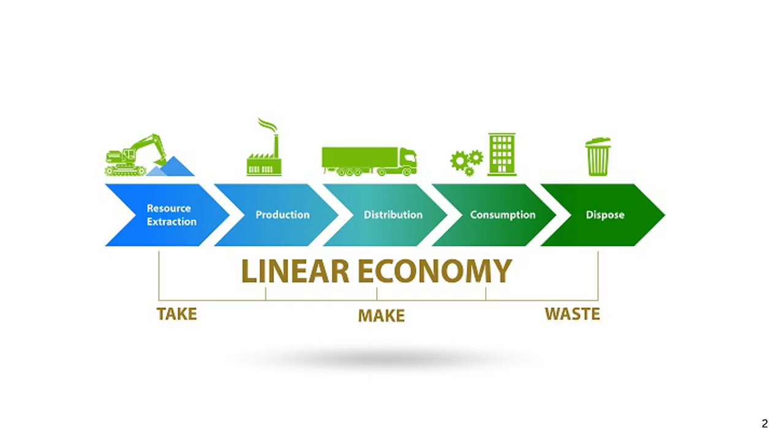So how do we break this cycle? The linear economy cycle, the linear economy model. This is where the concept of circular economy becomes a game changer, offering solutions that prioritize sustainability and long-term prosperity. So let us explore.

What is circular economy? It's a concept reshaping how we think about our world. The circular economy is an economic system that changes the way we have been doing things for decades. Unlike the traditional take, make, dispose linear model, where resources are used once and then disposed of, the circular economy is designed to eliminate waste and keep materials in use for as long as possible.

Here's a simple way to think about it. The linear economy is like using a disposable coffee cup — once you use it, you throw it away. Circular economy, on the other hand, is like using a reusable mug. You clean it, refill it, and use it again and again and again.

It's smarter, more sustainable, and better for the environment. In terms of cost, at the very beginning you may say buying a paper cup is cheaper and purchasing a reusable mug is a bit more expensive, but thinking long term, you can make savings — not only saving money, but also saving the environment.

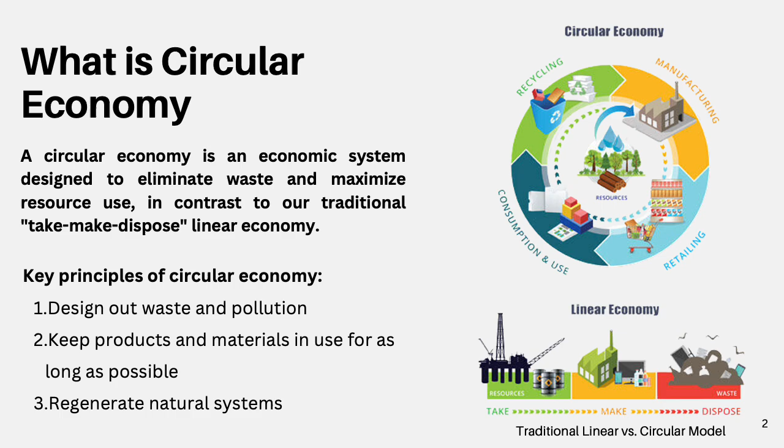Okay, let us break the concept into three simple yet powerful principles that can change how we interact with the world.

First is design out waste and pollution. Imagine if every product, like the packaging for your favorite snacks, is designed to biodegrade harmlessly into the environment, not producing microplastic but becoming fertilizer. You would definitely feel good, right?

For chemical engineers, this principle of design out waste means starting from design to remove the waste and pollution part. So the principle is designing processes that minimize byproducts and emissions. Think about using green chemistry techniques to eliminate hazardous waste during production. How can we create systems that are cleaner right from the beginning?

The second principle is keep materials or products in use. How many of you have an old smartphone sitting in a drawer now? What if instead of letting it gather dust, we recycle the metal inside to make new gadgets? Or better yet, the phone was refurbished and reused by someone else.

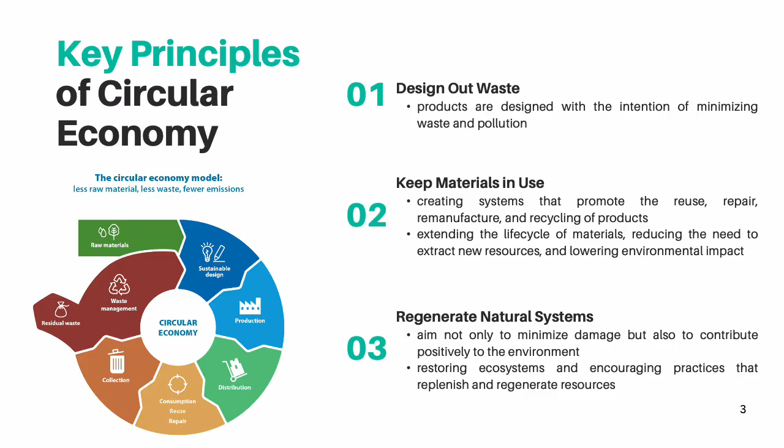You will definitely have a different process flow diagram, because remember, as a chemical engineer, our work goes beyond theories. We create practical solutions that bridge sustainability with industry, from designing processes to recycle material, optimizing how resources are used, and creating energy efficient systems.

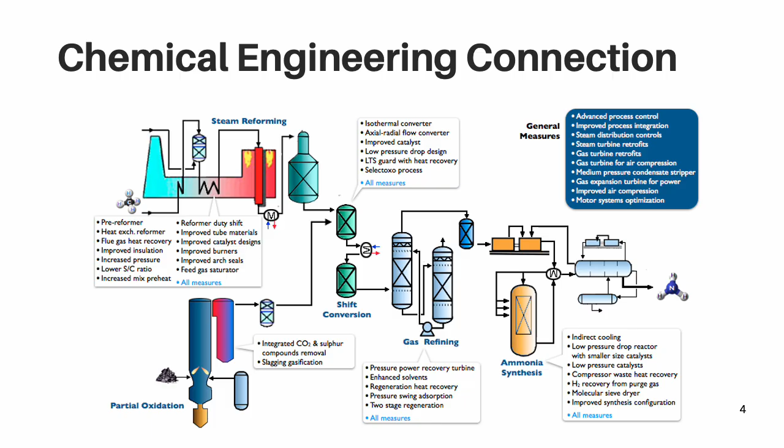So this is just an example, and I'll give you a detailed industrial application. This example is for a solvent recovery system. Let us look into a practical example.

Solvents are always the backbone of many industries, from pharmaceutical to petrochemicals, because solvents play a critical role in extracting and purifying chemicals. Throughout your subjects later, you will identify different types of solvents, and these solvents are commonly used in many industries.

However, this solvent is not cheap. They are expensive to produce, but another disadvantage is they are hazardous to dispose of. This is what you've learned in your lecture before, on law.

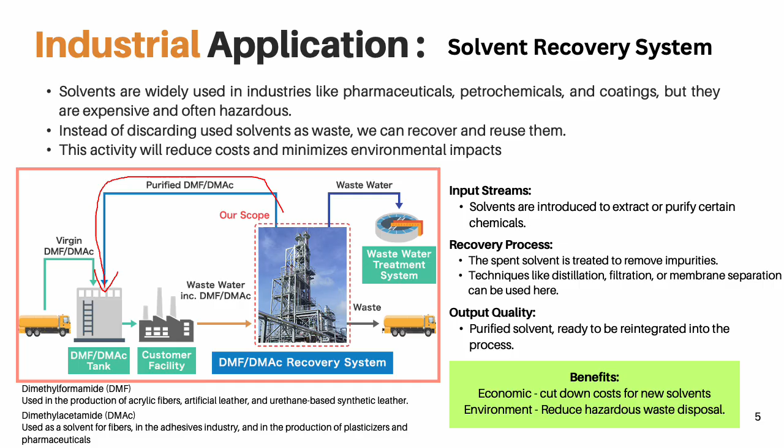So these are the things that can be made from a recovery system. Let us look at another industrial application: steam and condensate recovery process. Steam is a classic example of energy we often waste - once it becomes steam, after you heat certain products, the steam is just wasted. But in a circular economy, you can condense it and use it as feed for the boiler.

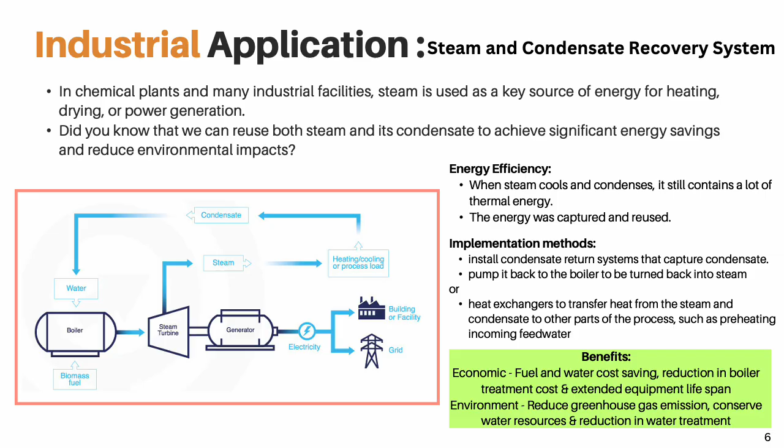So the boiler doesn't need new water to operate. By capturing and reusing this energy, we can dramatically improve efficiency. Imagine a factory installing a condensate system - instead of letting the condensate go down the drain, it's pumped back to the boiler to become steam again. This saves fuel, saves water, and of course saves money, while reducing greenhouse gas emissions - a win-win situation.

Implementation strategy - here we will talk about how to make this system work, because a successful system involves a few key strategies. The first one we want to see, because we want circular economy implemented in our company, is whether we need to install new equipment.

So the first one is equipment requirement. Adding a system like a heat exchanger, and the one that I showed you earlier in the solvent recovery system - these are equipment that need to be installed in a company.

Instead of producing the product, there is another equipment to be installed. The challenge is integrating this equipment into the existing setup without causing major disruption. Modular design can help ease this process. Design engineers, especially for chemical plants, should think about this: if in the future there is a possibility to install another equipment in your plant, you already know the setup area. This you will learn in your final year.

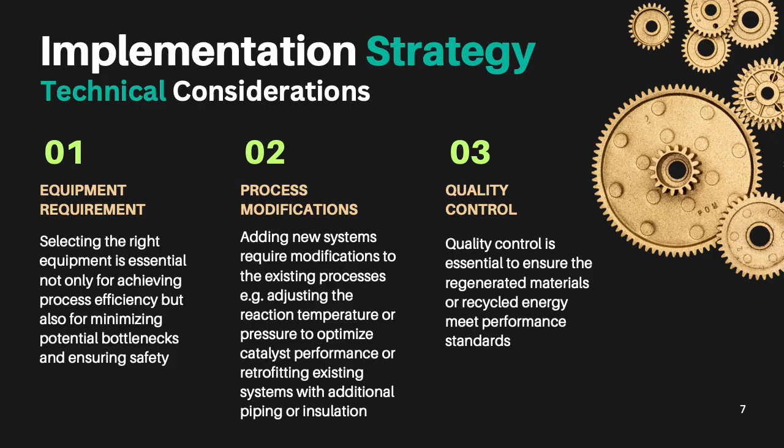Now the critical part, where the bosses will ask you, before you propose to the company, before you start the project, in your proposal you need to ask: is it worth the investment? Does it make financial sense? So to answer your boss, engineers normally break this into four key factors.

The first one is investment cost, the upfront expenses for equipment, installation, and setup. Whatever new equipment is installed in your company for recovery purposes, the equipment cost, installation cost, and setup of the area all fall under investment cost. Normally this is the biggest hurdle, as you need to really convince management that you will have a long-term gain.

Investment cost done, now operational cost. The operating cost is the ongoing expenses while your installed equipment is running, including maintenance, labor working on the processes, and materials used. All this falls under operating costs, which keep the system running efficiently, and you need to count these costs too.

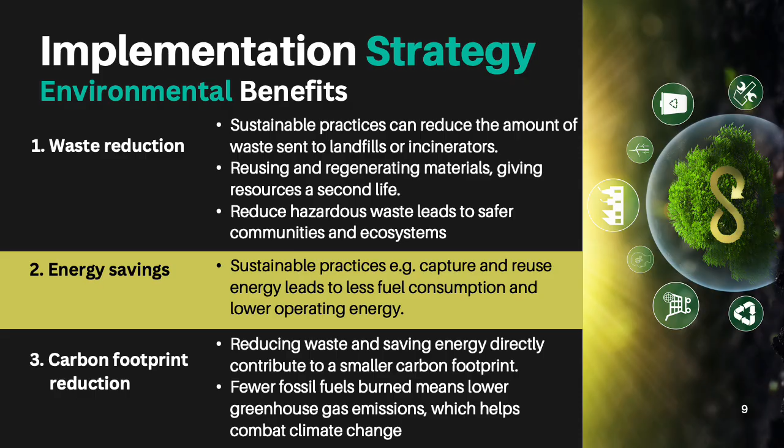So now imagine if industries adopted this. It's powerful to see how this innovation can create a win-win situation for everyone involved. Get it? Okay, so now it's your turn.